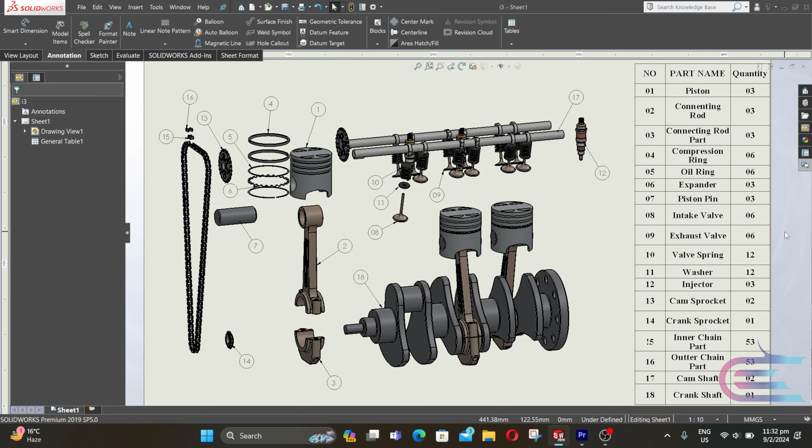Right click over right plane and select normal to. Right click again and select sketch. Select center line. Now follow the end of this vertical line and draw a horizontal line. Now press escape, select smart dimension.

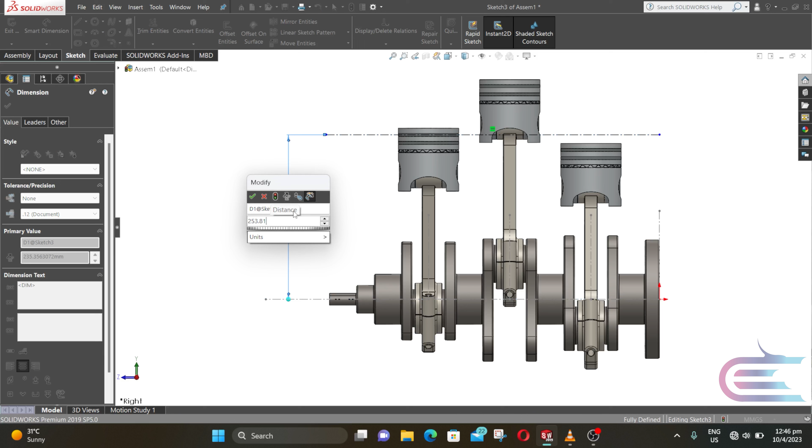And this distance is 253.817806 millimeter. Then click OK. Now exit the sketch.

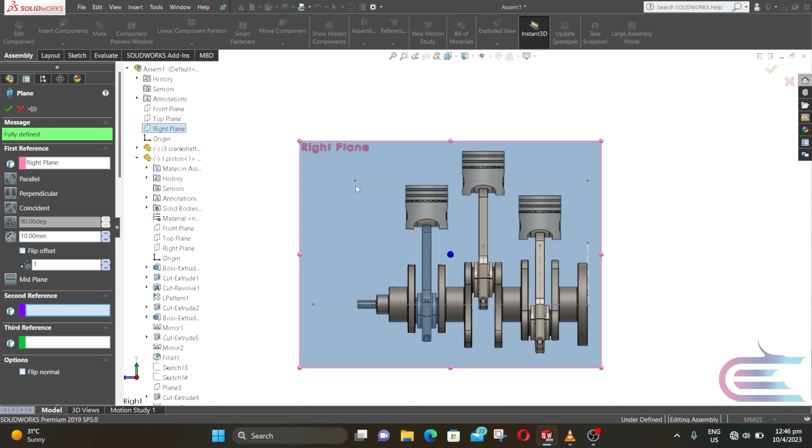From reference, select plane. Now expand assembly and select right plane. Now select this line as second reference.

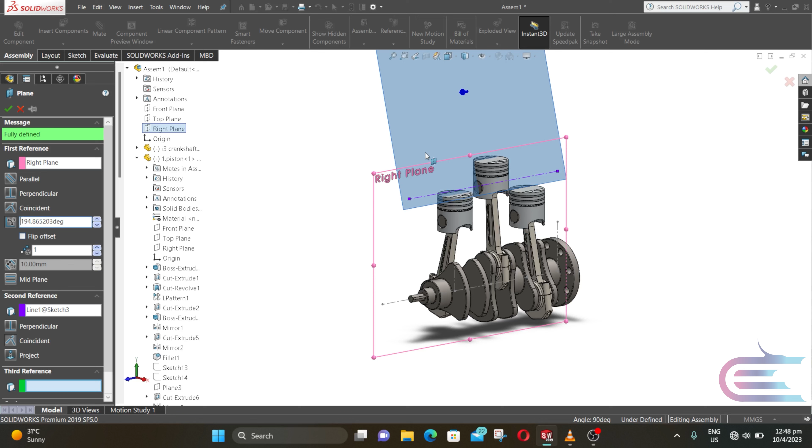Now click on angle and input angle 14.865203, and for direction add 180 degree with this. Now click OK.

Now repeat the similar process. This time click on flip offset. Then click OK.

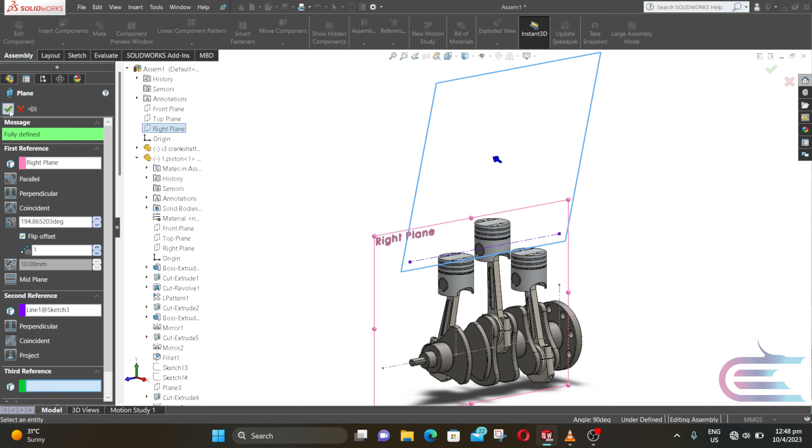Now right click over plane 1 and select normal to. Right click again and select sketch. Select center line and draw a horizontal line from this end.

Now select smart dimension and distance between these two lines is 144.963389 millimeter. Then click OK.

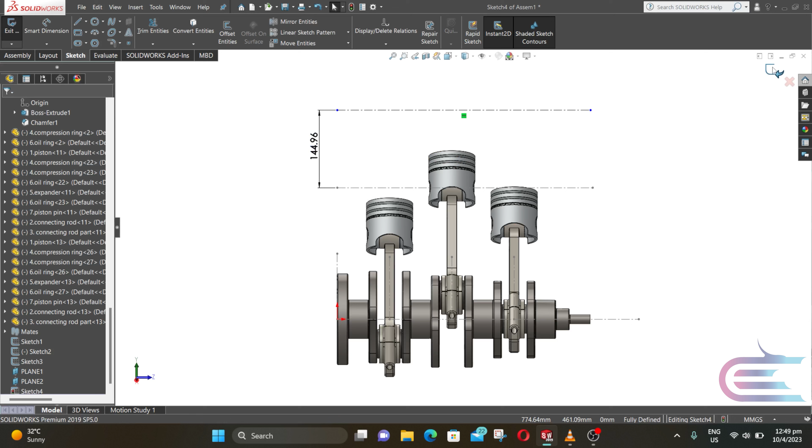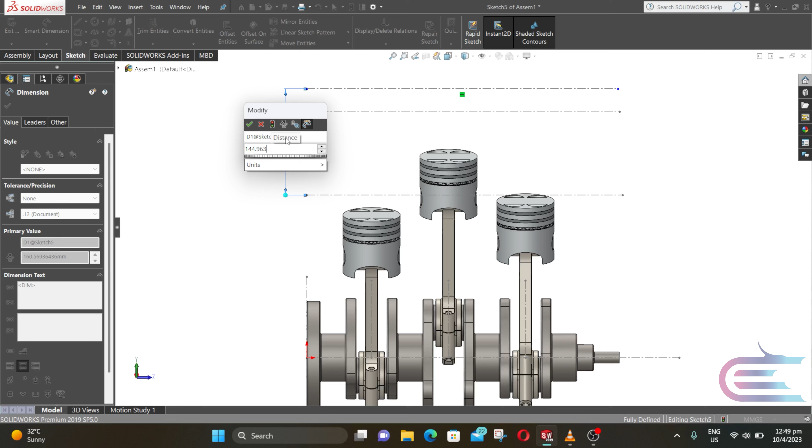Now exit the sketch. Now draw a line similarly in plane 2. Now exit the sketch.

Select insert components and select camshaft. Then click on open. Now click here to place it.

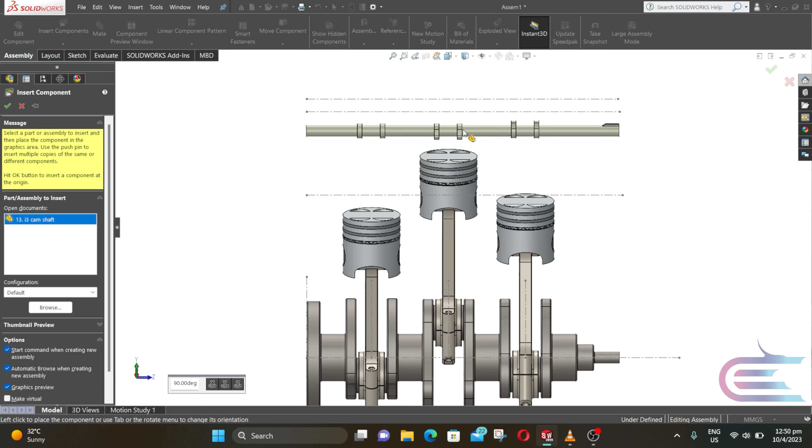Now press Ctrl and select this surface and this line. Then click on mate. Select concentric and click OK.

Now click on the end point of this line and this surface. Select coincident and click OK.

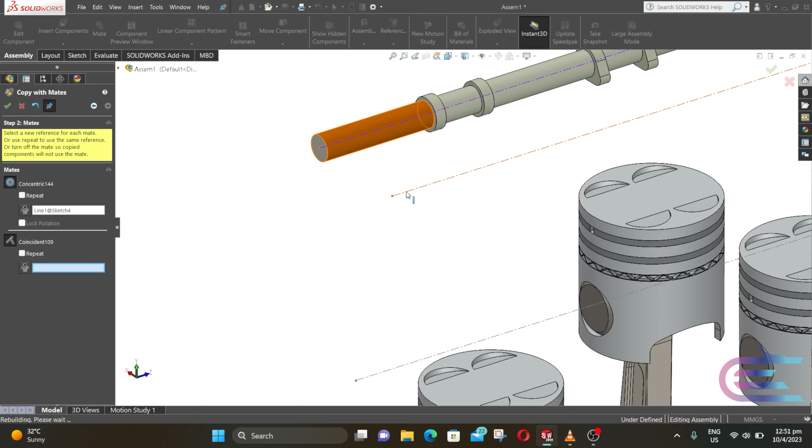Now expand insert components and select copy with mates. Select the camshaft and click on next. Now select this line and the end of this line. Then click OK. Now close the mate.

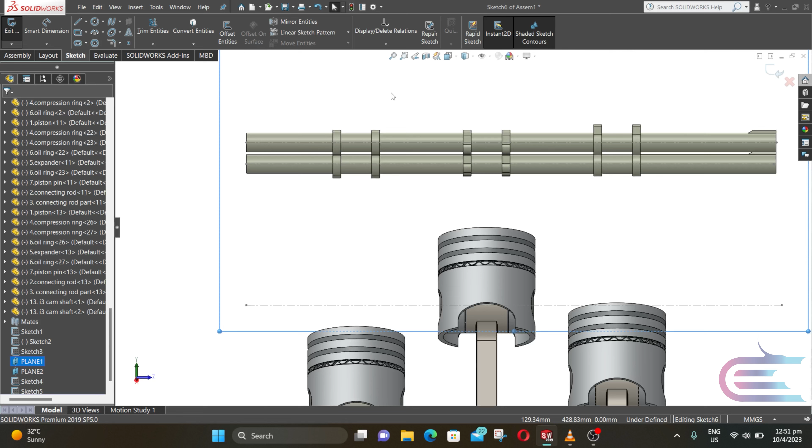Right click over plane 1 and select normal to. Right click again and select sketch. Select center line and put the cursor over the cam profile edge, and from the horizontal line draw a vertical line.

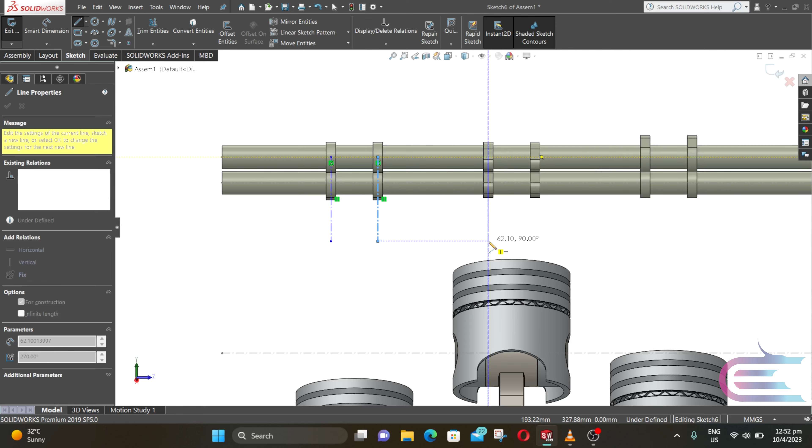Now repeat the same process for all other cam profiles. Now exit the sketch. Now repeat the same process for plane 2.

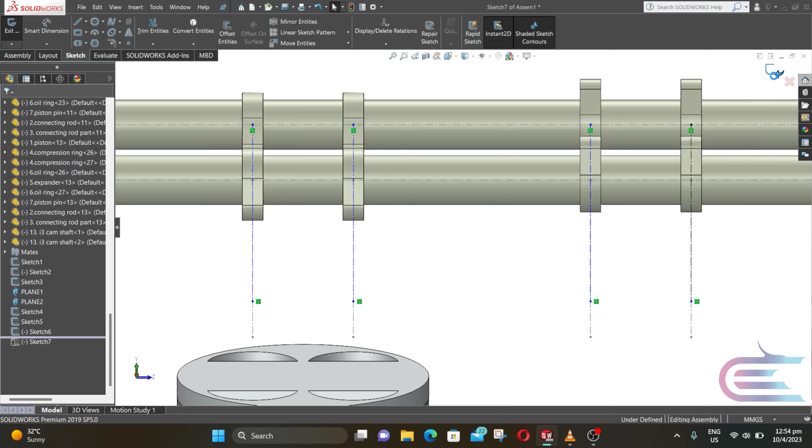Now right click over right plane and select normal to. Right click again and select sketch. Select center line. From this edge, draw a horizontal line.

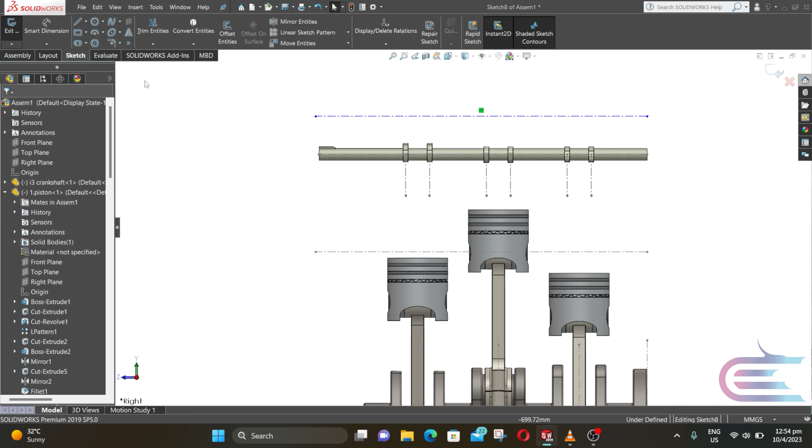This distance is 413.78511669 millimeter.

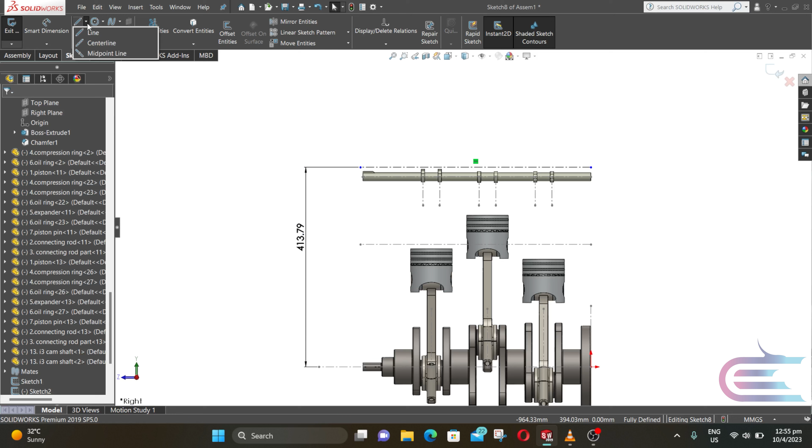Now select center line again. Now put the cursor at this edge between two cam profile. Then middle point will be shown. Following the middle point, draw a vertical line from the previous horizontal line.

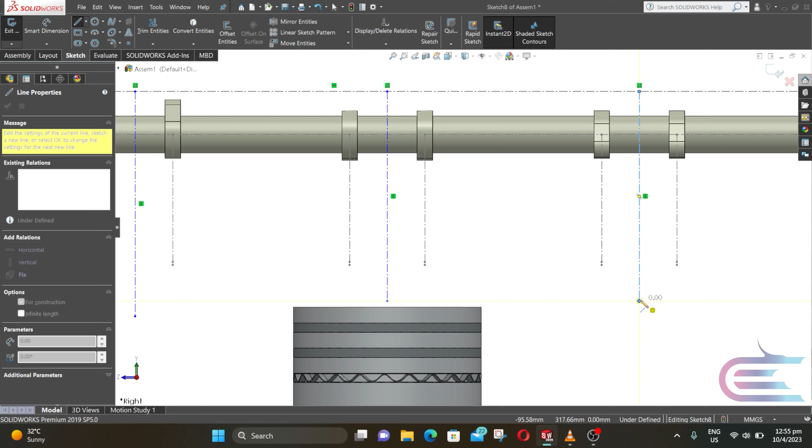Now repeat the same process. Now exit the sketch.

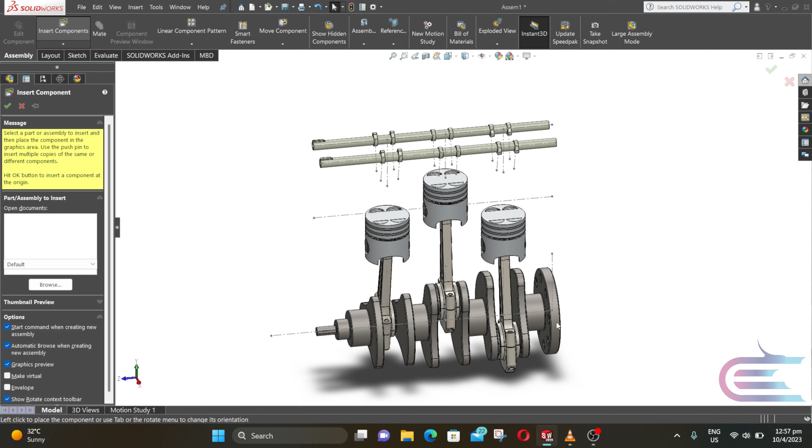Now click on insert component and select intake valve, valve spring and washer. Then click on open. Now click on the components to put it.

Click on mate. Now click on the tangential surface of the valve spring and the tangential surface of the intake valve. Select concentric and click OK.

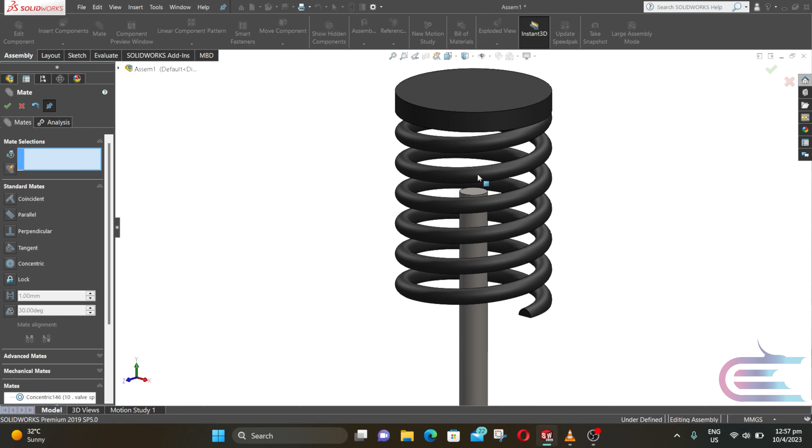Now select this surface and this surface. Then select coincident and click OK.

Now select the tangential surface of the washer and the intake valve. Select concentric and click OK.

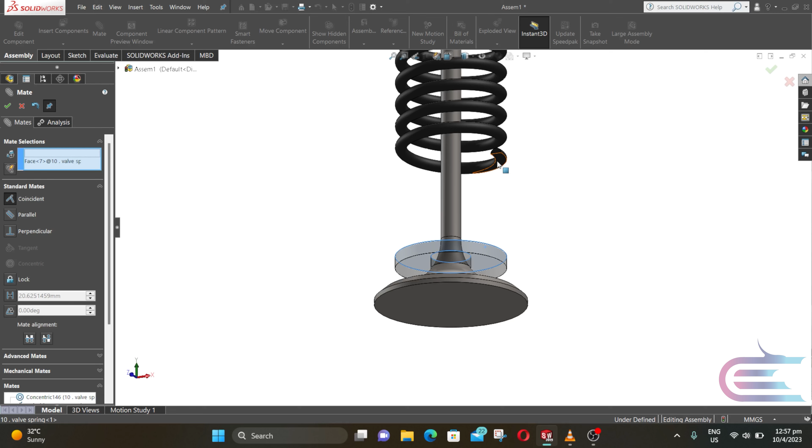Now select the upper surface of the washer and the lower surface of the valve spring. Select coincident and click OK.

Now select the tangential surface of the valve spring and this vertical center line. Select concentric and click OK.

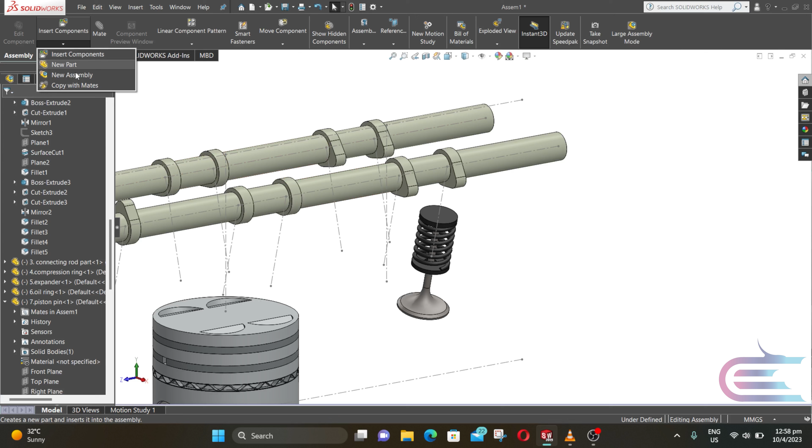Now select copy with mates and select this whole assembly. Then click on next. Now select the adjacent vertical line. Then click OK. Now repeat the same process.

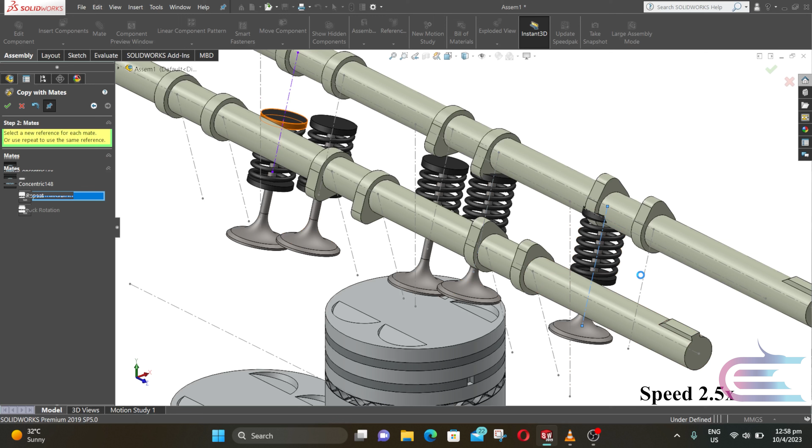Now click on insert and click on exhaust valve, valve spring and washer. Now click on open. Now assemble the exhaust valve similarly to the intake valve.

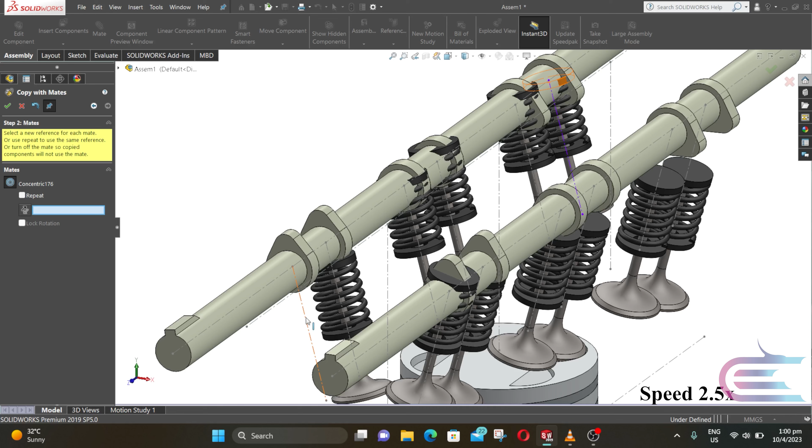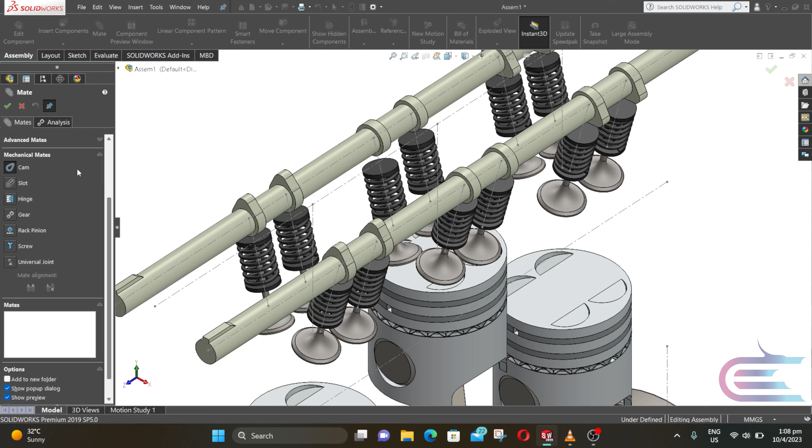Click on mate. Now expand mechanical mate and select cam. Select the cam profile surface and select this surface. Then press enter.

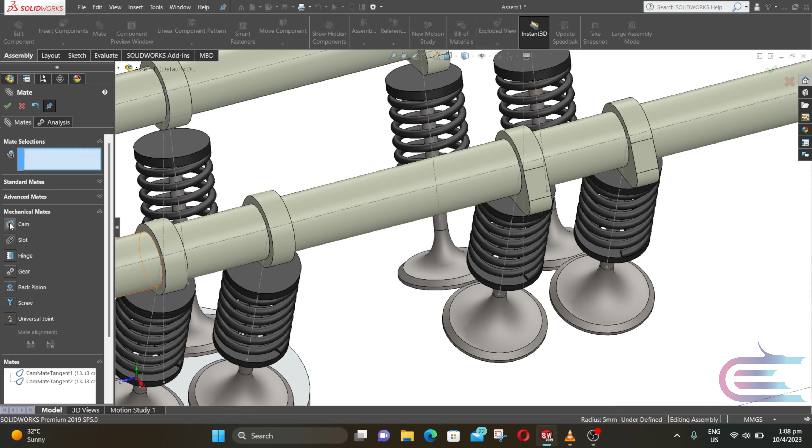Now select cam again and select these two surfaces. Then press enter. Now repeat the process for all other cam and the valve spring.

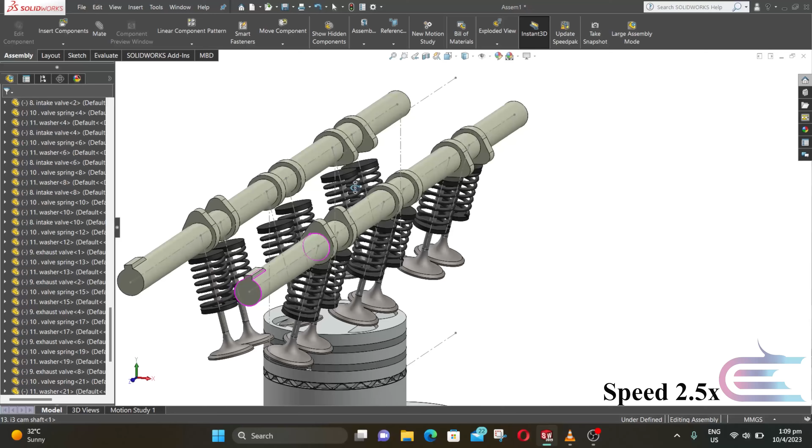Now rotate the camshaft and check the assembly. It's working properly.